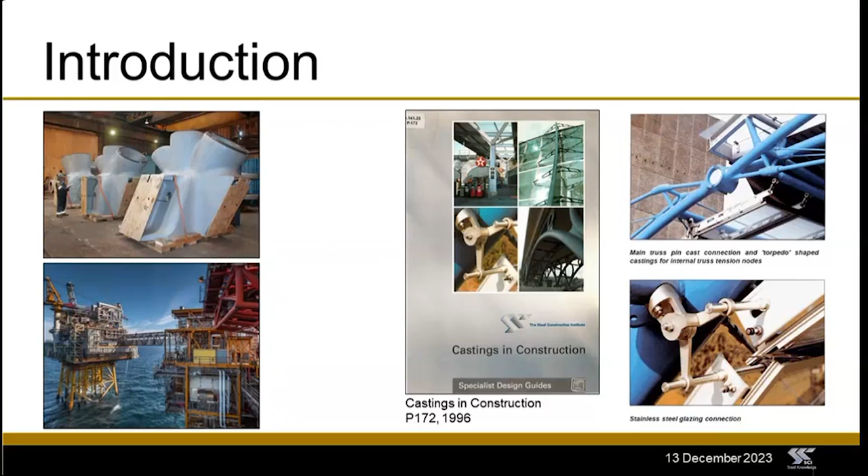So this led to the SCI publication P172, written by myself, being published in 1996. Well, that's quite a while ago, and a lot has changed in the last 27 years. So I've written a new publication, which will be available and sent out to you probably end of January, February next year.

Clearly, we use European standards now, so the new guide will talk about European standards. What else has changed? We live in a low carbon world, so material optimization is very important. So a good reason to use castings. Technology has advanced again in terms of casting design, analysis, and manufacturing practices.

So there's a lot of interesting information to talk about structural steel castings, and I'm very pleased now to be able to hand over to our guest speaker for today's webinar, who is Jennifer Pasden. She's a licensed professional engineer and vice president of the organization CastConnex, and she heads up their office in London. And she is now going to lead us through the webinar. Over to you, Jennifer.

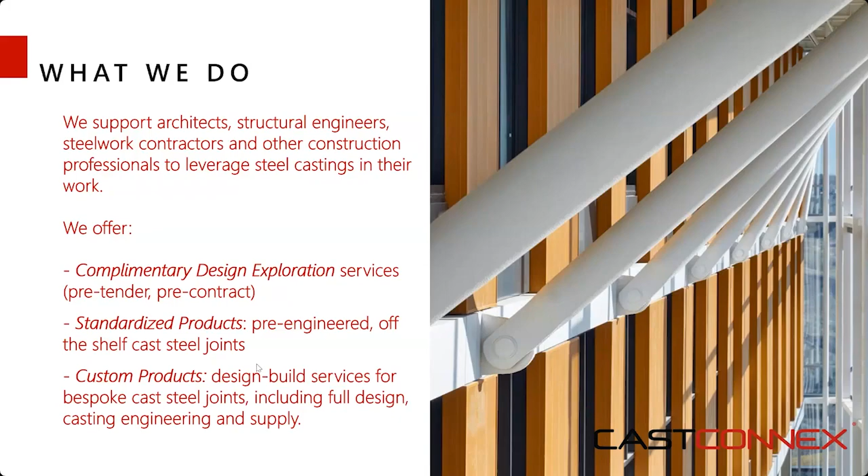Custom products, these would be for bespoke castings that are one-off. So here we're also not pre-engineering, but we're engineering, offering design build services for these bespoke cast steel joints, as well as supply. So on to the first portion of the outline.

What are structural steel castings? Normally if we were in a room together and I was able to see your faces, I would ask for a show of hands of how many people have actually worked with a structural steel casting before. I heard at some point we might have about 300 people, so I would expect there'd be a few dozen perhaps. And that's something that we're hoping to help folks change by having a presence here in the UK.

But also keep in mind, if you've ever used a tension rod connector with a clevis end, that's a steel casting. So in fact, you have probably specified and worked with them. But there's a whole host of opportunities for custom and other solutions that castings can provide.

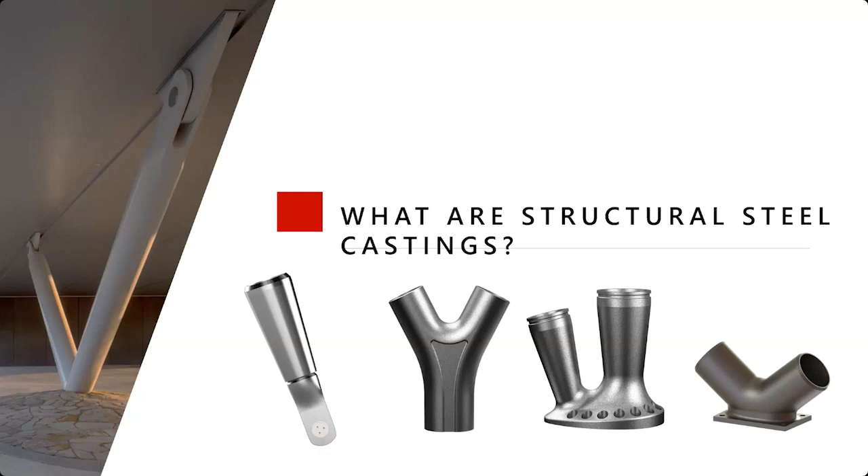So what differentiates a steel casting from wrought steel? Many of you have probably visited a steel mill. You've seen how a wide flange becomes a wide flange being rolled through a die down the line.

But in fact, all steel is cast. So rolled steel, or wrought steel, is actually poured as an ingot, or a dog bone as it's called in the US sometimes, before it's worked and extruded through these dies to create the shapes that we're familiar with specifying in our steel design codes. So that continuous casting process is used for wrought steel shapes.

The difference with a steel casting is that we're not working with extrusions. So in the picture on the right, you see we're building out a mold, we're pouring molten metal into it, and then the finished geometry of that mold is actually the geometry of the casting itself.

So what that does, that is very exciting from a structural engineering perspective, is that it means that we're able to put material where we need it for the flow of forces. So we can assess members coming into a joint, and rather than being limited to cutting up plates, angles, channels, and then bolting and welding them together, we can actually envision what would be the optimal material location to address the flow of forces through the part, and other ways that we can minimize material usage as well as simplify fabrication.

From an architectural standpoint, if there are any architects, we all work with architects, they're our clients, right? It means that architects are able to sculpt structural steel. So they're able to think of this element of structure as also an element of the design. Rather than being prepared to cloak structural connections or hide them behind walls, the structural form can become part of the design expression itself.

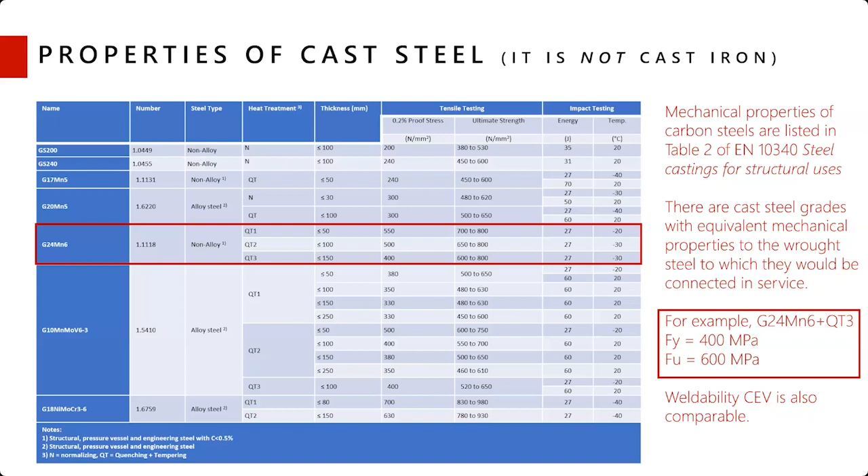Yield stress of 400 MPa, so that's putting it close to your S355. The mechanicals, the weldability, the carbon equivalent, all of that you're going to see is going to be similar for these cast steel grades, which are all standardized in Euro codes, as well as through ASTM specification when we work in other locations.

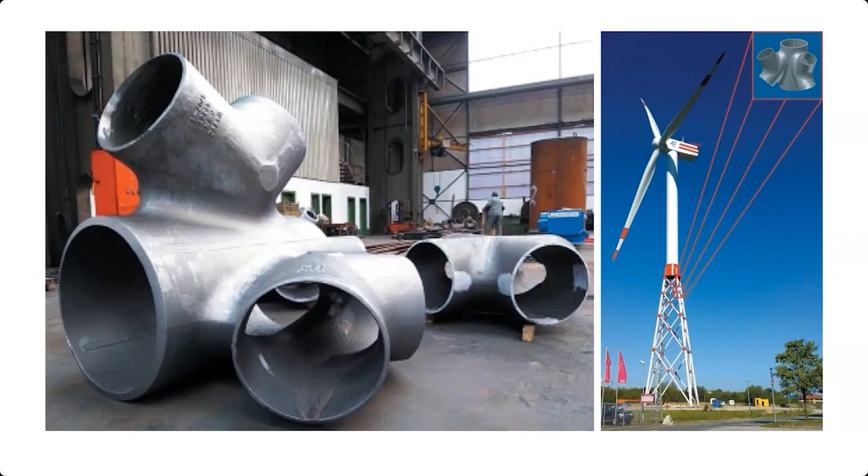For that reason, the first applications of steel castings that we saw in structural applications, as Nancy alluded to, would be in the offshore industry, where quite evidently the mechanical properties of that steel in these ambitious structures is very important. And weldability, as you can see, the way this node is prepared, it's quite evidently going to be welded to the attaching incoming members.

You can see in the inset on the right that this is an onshore mock-up of what will be an offshore wind turbine, and at that red location is where this joint lives. If there are any architects on the line, this is a beautiful looking thing, but it will spend its entire lifetime underwater. So it's not only in architecturally exposed applications where we can think of castings—they're actually very hard working. That's why I start with this example to preclude the myth that castings are brittle, that they crack, and that they have poor material qualities.

A properly designed and properly specified casting will have isotropic materials and can outperform material-wise wrought steel.

The offshore oil industry was using steel castings in these applications because they have things like these giant towers holding offshore oil platforms that are constantly battered by wind and wave action, which brings up fatigue considerations. They're also underwater in a very corrosive environment, so limiting the extent to which the steel might corrode is going to be very important for a structure of this size.

Having to maintain the connections is close to impossible. So the more durability they can find, both from the coating system and by minimizing the complexity or propensity for the coating system to fail by making a much smoother joint, is going to be important.

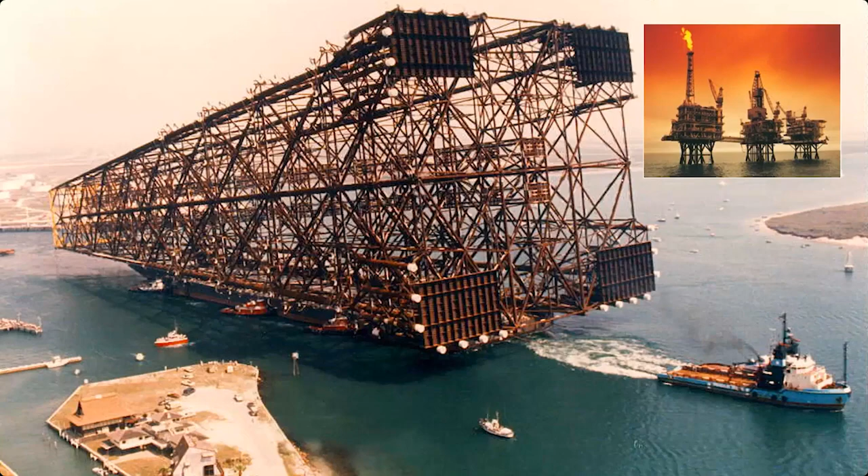So conventionally fabricating a connection like this, some of the things they tried were stepping up and making a through member so that you pull those weld intersections away from each other, so you just have one weld around each tube, and you're not getting weld toe overlaps.

But then once the D over T ratio, the wall thickness to the diameter of the connection, becomes flimsier and softer, there is need for internal stiffeners. It's difficult to fabricate—to stuff a plate inside a tube and weld it, get someone in there and hopefully not leave them there after the connection is fabricated, or grout filling, or all sorts of things.

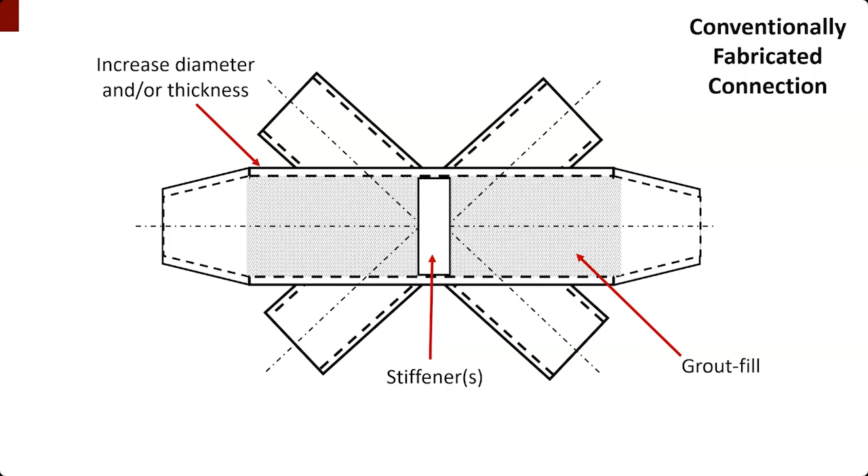But this basically exemplifies how it was increasing the complexity of fabrication as well as overall increasing tonnage at each connection, which makes the structure more costly. Whereas turning to casting manufacturing, they're able to put molten metal where it's needed to address the flow of forces through the joint.

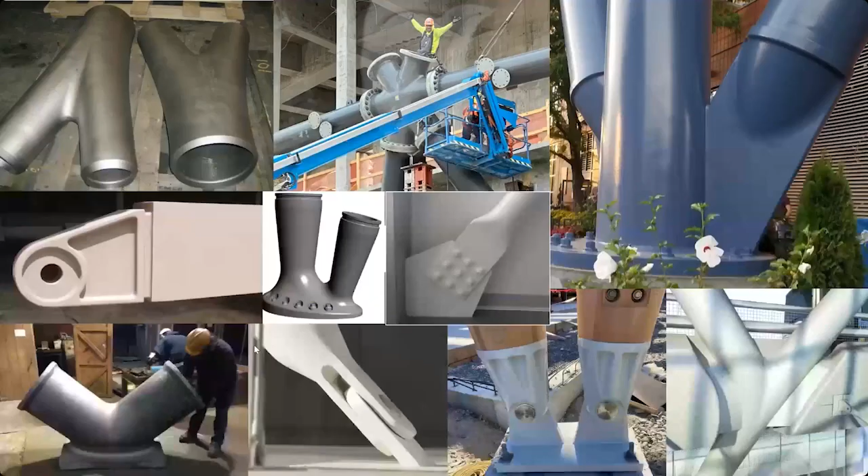Castings are ideal for fatigue, and that's why you'll see so many examples of them being used in bridges throughout Europe, in applications where you have cyclical loading, either vehicular or rail.

The advantage being gained here is that if we were subjected to local limit states at this connection point, the codes would tell you that you need to thicken the wall of the members or increase their size. If you imagine much thicker or wider members, you no longer have this light lattice-looking structure. That's why in so many examples designers use steel castings to lighten up the structure, to address those high connection forces at the kernel, and then use the members to address member forces, which is what they are intended to do.

A concept that's important to understand with castings is that when we're looking at a non-standardized, bespoke casting, the manufacturing process requires a set of tooling to make each one. When there is repetition, there's an economy of scale achieved because the cost of that initial tooling is amortized over the number of castings you have. So something to look out for when assessing a project is whether there's a standardized connector available off the shelf. If not, if it's custom, do you have a number of them, which will help improve the economy.

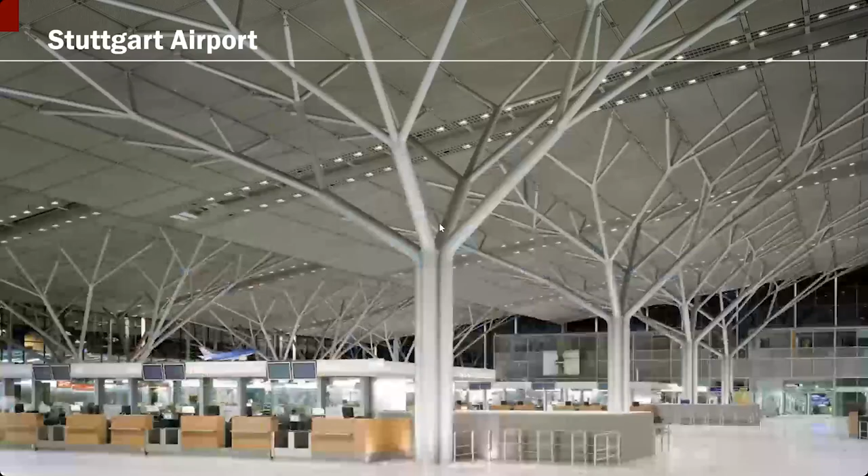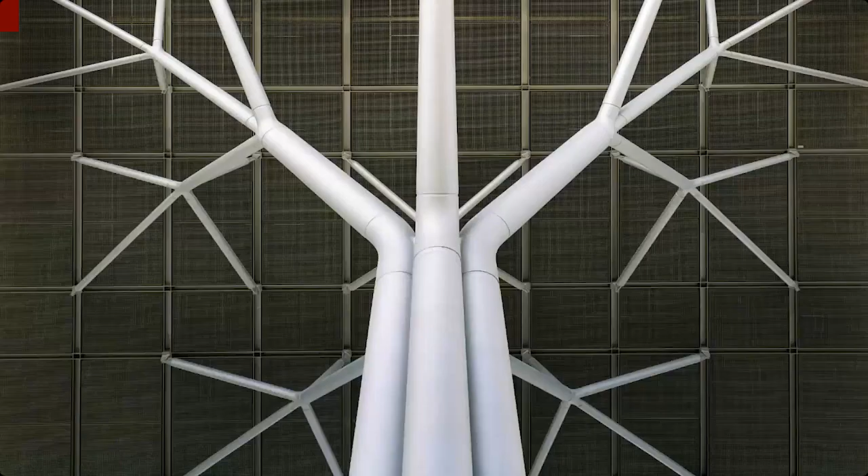Back over in Germany, Stuttgart Airport is a beautiful example of cast steel tree nodes, as we would call them. Certainly there's a more potentially structurally rational way to support a long span roof than with these beautiful trees, but it makes for a statement, it makes for a destination, and really puts this airport in the architectural canon. At each one of these branch locations down to the trunk is a cast steel connection.

Something interesting to note is that, as we'll see later, castings are cast against sand, so their surface finish is a thing to consider. It can be upgraded - it's going to come out looking sort of like an orange peel because it's cast against sand, but it can be ground and polished to be as shiny as you'd like, to look even better than, say, the attached rolled steel.

But you want to take into consideration a number of things, one of them being viewing distance. This picture we're looking at is actually taken with a zoom lens - this is 60 feet up in the air. Only birds at the airport would actually see the casting this close. But having this picture is helpful to describe this molded surface texture that is inherent to the casting manufacturing process.

Other things to consider: if you're going to paint the entire thing with intumescent paint, then the surface finish of the underlying steel becomes kind of irrelevant, because the intumescent paint tends to have a mottled texture to itself. What they've done here, which is a really beautiful accent, is incorporate these recessed reveals into the casting.

You can see with one of the incoming tubes a slightly visible weld mark that wasn't quite remediated, and that's the extent of the casting - that's where the casting is welded to the tube. Then you have this recessed reveal, which draws your eye to the reveal and to the connection point as well. So we're able to celebrate this really interesting geometry that's occurring here, very fluid, representing flow of forces and structural tectonics. But it also draws our eye away from the fact that the surface finish between the tube and the casting would be different because of the different manufacturing processes.

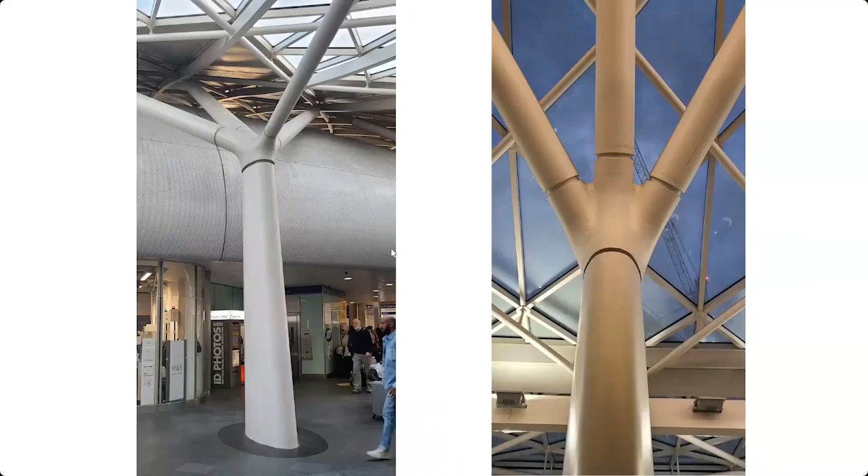Closer to home, I've been enjoying taking a tour of structural steel castings throughout London in my time here. King's Cross, a very notable project, again utilizing sort of a steel tree casting. Paddington Station - if you look up and if you look down, and if you look up at the roof - is loaded with structural steel castings that are really nicely executed.

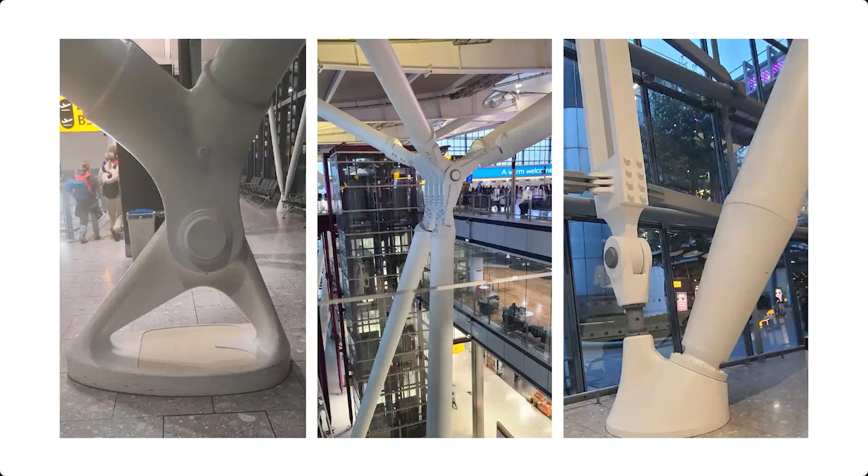Terminal 5, of course, massive castings supporting the structure that supports the long span roof as well as the curtain wall.

So, performance benefits. Why are we using these, although beautiful, and I've spoken about some of that, let's dial down harder on exactly what the performance and construction benefits of cast steel nodes are.

This is a very wordy slide, but I thought I'd include it here to be referred to again later. Overall, structural performance and efficiency is improved by this material use optimization that I've harped on a bit, eliminating the connection local limit states by using members for member forces, and then addressing higher forces at the joint with the casting.

Reduction in member design forces, I'll show an example of that. Increasing connection stiffness and also certainty of connection stiffness.

With the casting, we're pouring one monolithic part, right? So we know what its stiffness is. Whereas with a bolted or welded connection, is it rigid, is it semi-rigid, is always kind of a question. Those connections can become quite soft. With a casting, we have much more certainty, which can be important in applications where stiffness is controlling the design.

Improved fatigue performance, important in bridges, not so much buildings.

Simplifying fabrication. I'm going to do some project case studies, and you'll see that the connections there are left with very simple to access welds, eliminating the amount of cutting and fitting up required in fabrication, simplifying field activities.

With castings, the controlled manufacturing process means that we have tolerances far better than those minimum in fabrication of connections. That means better fit up in the field and reducing risk for all parties involved.

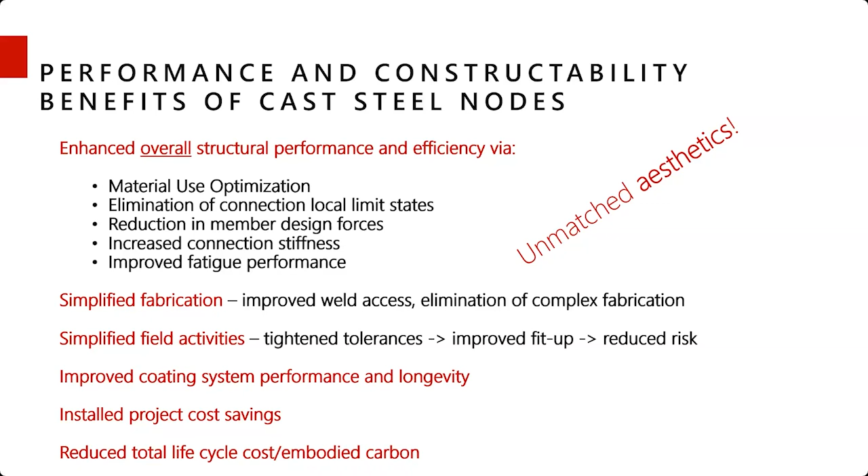But I also added it as sort of an afterthought, because I do want to stress that castings are used in building and bridge applications to do very hard work and improve performance, and very often no one sees them. You just may not hear about them because you can't see them. The case study I'll show at the end of the project is a good example of that.

So just as a thinking model as we go through and look at these project case studies, if we think about one tube-to-tube connection and see what the casting is doing for us - the overall theme is that we're moving the weld away from high connection forces, and we're also reducing geometric stress risers.

If you imagine we're asking forces to come in through that branch member and hang a right angle, that's giving us a stress concentration factor, a geometric stress riser, stacked right on top of where we've created discontinuities in the weld metal. The weld metal is always going to be the place where you have the most discontinuities and potential for failure, and it also affects fatigue.

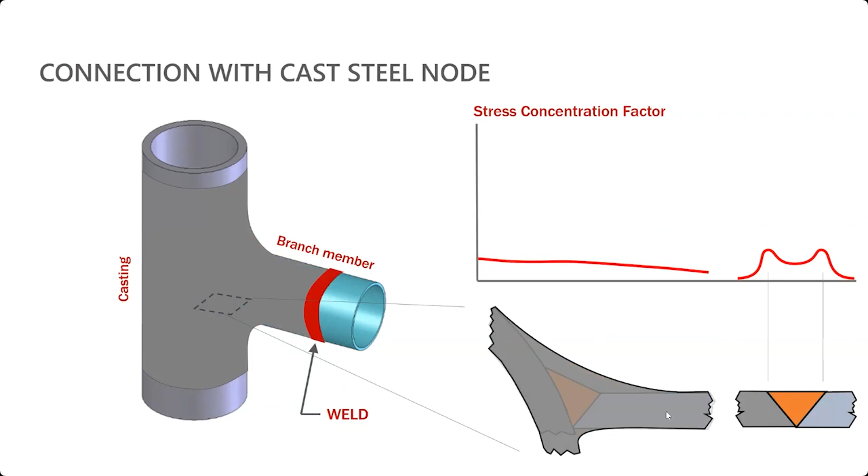With a casting, what we're doing is making that whole joint one monolithic part, and we're pulling the weld away from those high connection forces, providing a more graceful stress trajectory and getting the weld away from where those higher forces would be in any case.

Tonnage saving. Using a tube as an example, although with wide flange or channel connections we sometimes need local stiffeners, we can preclude that need with a steel casting. Addressing what would be a local limit state or a softness in a connection locally, rather than upsizing the wall of the tube so it can do work just at the connection point but be wasted throughout the length of the member, we're concentrating material where it needs to be, providing lower tonnage and lighter forces.

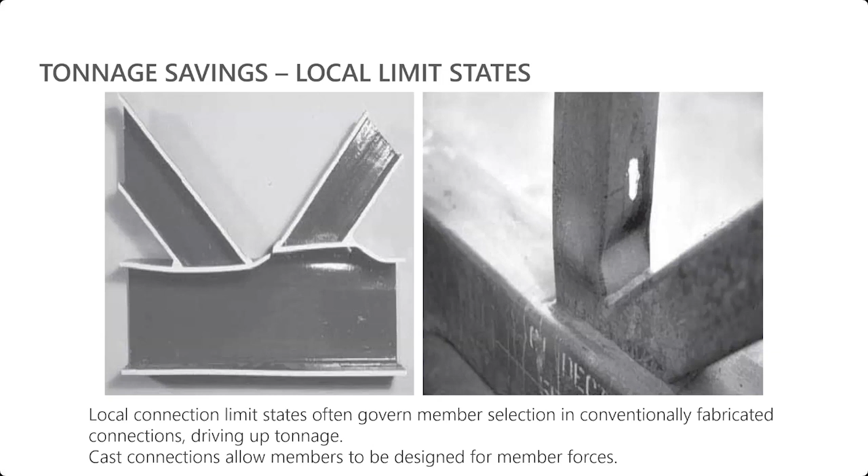Members connecting to castings can be designed for member forces. The other thing that's important to consider, and can become really substantial on certain scales of project, is that we are also reducing the member design force itself. An example here is that the casting connects away from the centroid of this connection, much farther away than if there weren't that nozzle in there. That means we're reducing overall the member design force, which can be quite substantial, depending on the geometric scale of the project.

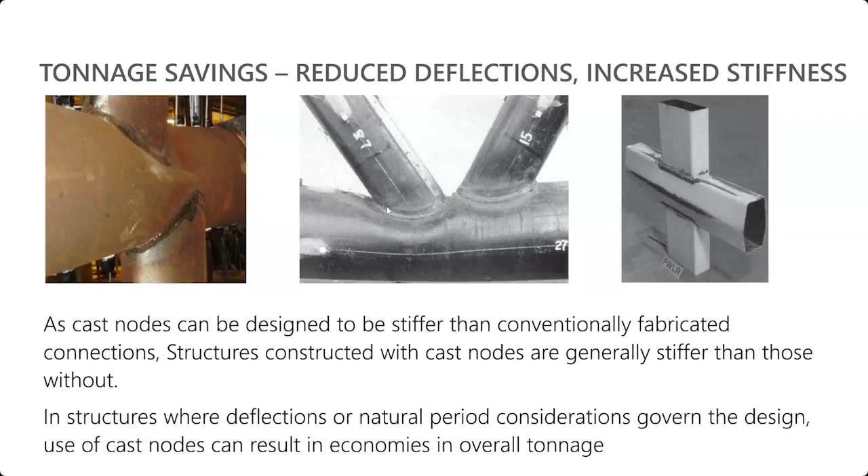Tonnage savings can also come from projects where we have a concern for stiffness. If stiffness or period is controlling the design, we can reduce deflections, increase stiffness, and have much more certainty about what the stiffness of that connection is, because it's one monolithic part and doesn't have these sort of vagaries with welding and bolting.

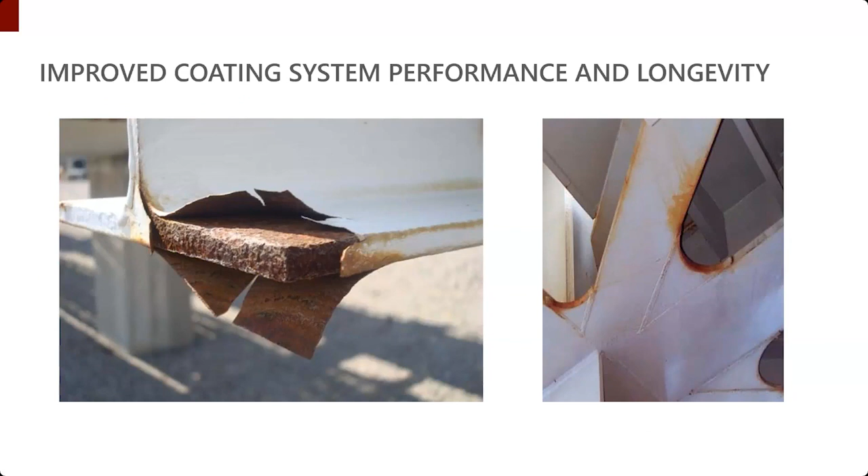Not something we think about as structural engineers, but if you are an owner or a taxpayer, you are going to be concerned, especially for public projects, about the quality of them, their durability, and the expense to maintain them. On many of the projects we do that are outside or transit stations, it becomes very evident that having these more generous radii that do not encourage corrosion and failure of coating systems, having welds that are easy to access, easy to coat, and also easy to inspect both for structural performance and later for coating inspection, simplifies that process as well.

If we think back to the offshore oil structure, it's very important to have the coating system performance, and it's also important onshore. So now that we've looked at some of these performance benefits, if you're thinking you've never used a steel casting in a project before, what are some of the top applications where we can utilize structural steel castings?

Architecturally exposed structural steel, or AESS as we call it in the US and Canada, particularly for structures comprised of circular hollow sections, or even rectangular or timber. We're seeing more and more mass timber being built around the world. Timber connections are difficult, and any mass timber structure of any size is actually going to be steel-timber hybrid. Because of their geometric flexibility, castings can be a really good solution for mass timber connections.

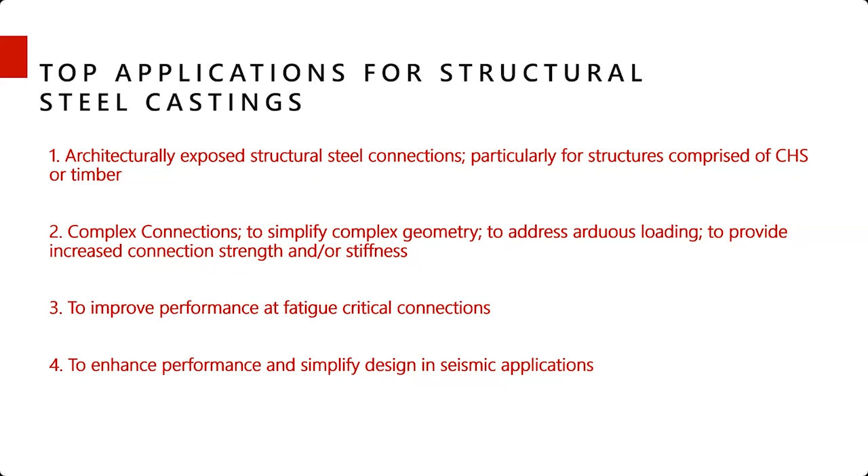Complex connections, whether it's geometric complexity or arduous loading, again allow us to dial down more on connection strength or stiffness when we have a structure whose performance is going to be dictated by it. Fatigue is another application, more in bridges than in buildings. And then, though I won't talk about this given our location, we have quite a bit of experience developing connections that are important in seismic applications where earthquakes are a concern in the region.

So on to some project case studies that elucidate a number of these performance benefits in the top applications I spoke of. The first one is actually a seismic application, which I'll explain quickly. Salesforce Transit Center is a 4.5 city block long transit station in downtown San Francisco, California, on the Pacific Ring of Fire, sitting on a fault line. It also sits on garbage—basically the soil is all fill. So all of the worst conditions you could imagine for a building to survive a seismic event.

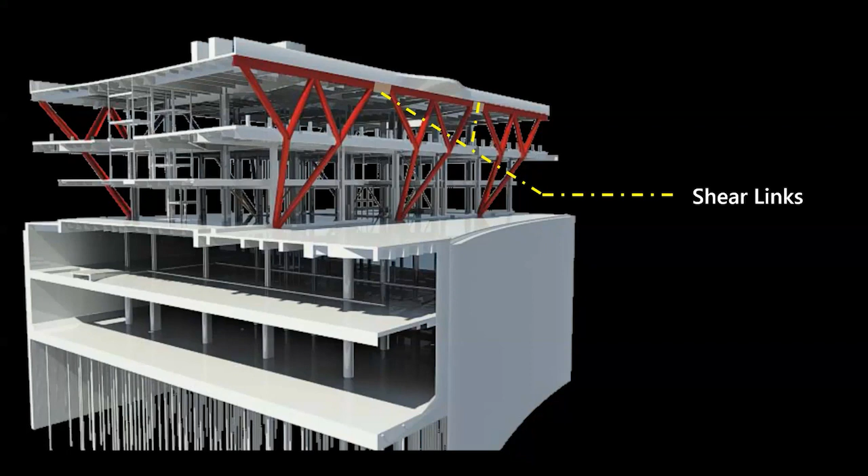The concept on this project, designed by Thornton Tomasetti in their LA office, was to use what our codes call an eccentric brace frame, or EBF. Conceptually, the shear link that sits between these modified braced columns is not concentric, it's eccentric, so it gets destroyed as the building racks back and forth in a seismic event to dissipate seismic energy. For that to happen, it's very important that these braces and their connections don't fail first, so they are capacity-designed to ensure the performance of the shear link, allowing it to actually do its work dissipating ground motions.

Also of note, these braces are exposed and wrap around the entire perimeter of the building, becoming the main aesthetic aspect of the building itself. For these reasons, the designers chose to utilize steel castings at the connection points of these large pipe sections. You can see there's a pin at the top. The bus deck node in the middle joins these two-to-one braces as they come down, and then at the base, where we have a close viewing distance for people using the transit station.

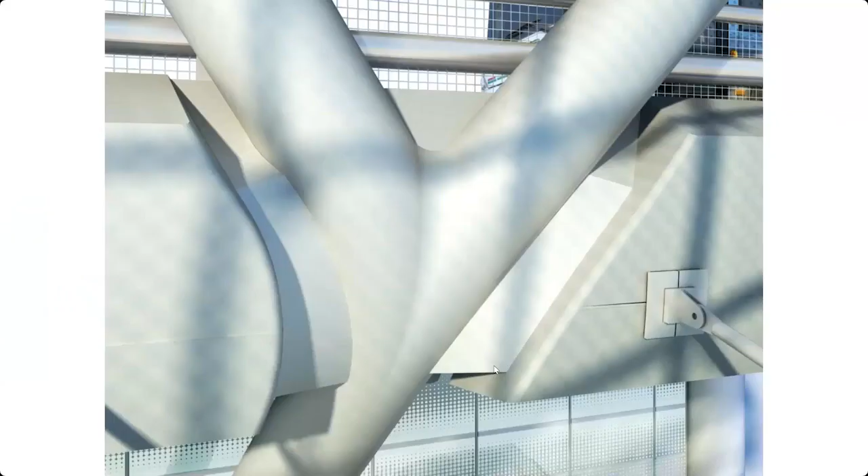A nice close-up here. If you try to think through how that might have been fabricated, it becomes a puzzle, how this would actually be fabricated with conventional methods. And not only that, but how would it be fabricated, and then how would they cover it up? Because it would not have looked very nice.

Whereas you can see in this last photo here that we've covered up the bolted connection at the ends of the tube to the plate girders, but overall, the structure is becoming part of the expression of the architecture, and the flow of forces through the structure can be seen in the joint.

Another aspect of this project that utilizes castings is something called a light column. We'd like to think of this one as sort of a kit of parts. It's a series of roller bent circles that are enabling this opening up of the column that gradually opens up and supports an atrium that lets natural light in.

Each one of the verticals is actually just a straight run of API pipe. So all of the intelligence, all of that gentle curvature is contained within the geometry of the casting itself. With the CNC machine precision that we have in these nozzle ends, we know that as long as that pipe is straight, when it fits up with the casting, it's going to be exactly in the right place when it fits up with the next casting.

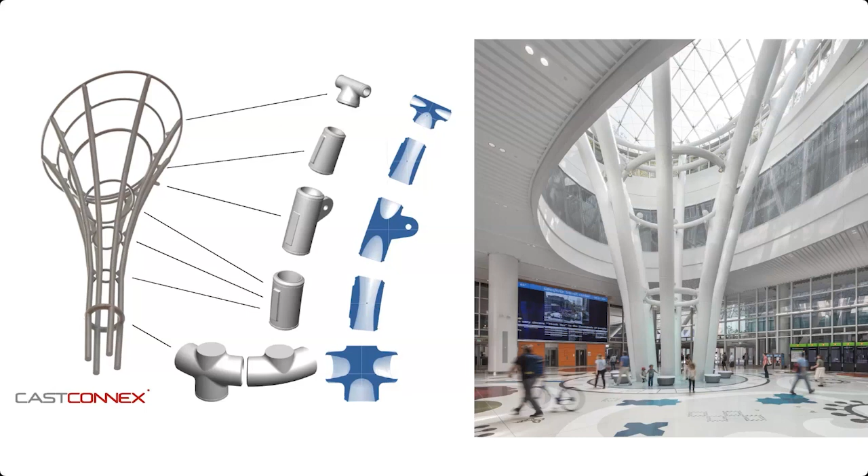You can also see in the cross section here that we are tweaking the wall thickness. We're thinning it out to match the member wall thickness, and then thickening it in the middle here where we have these local point loads that are coming in from the rings itself. So a real expression of optimizing material usage.

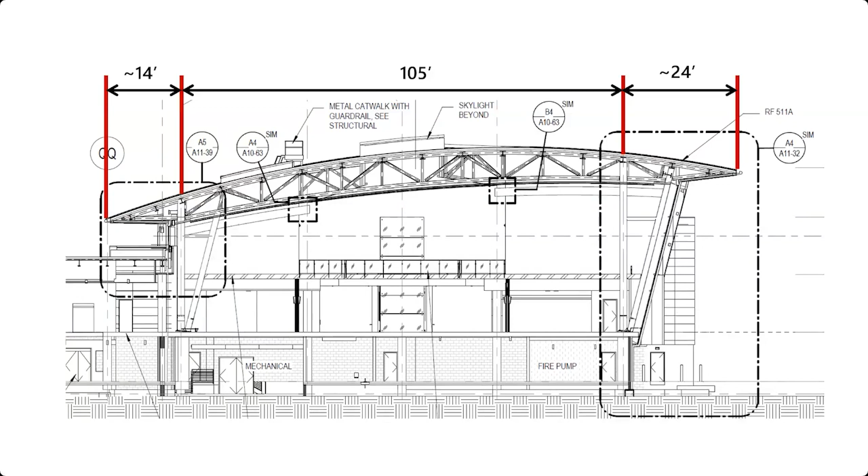This project, Charlotte Douglas International Airport expansion, if you imagine a cut through this cross section, there's a long span trussed roof that's supported by a vertical and a raked column. And the designers here really wanted to celebrate the structure rather than what is often the case in airports, where these things will get hidden behind architectural metal.

So they reached out to us, and this is something that we and other casting suppliers can do with clients, is take a look at, okay, what are the geometries? You have a vertical column and you have a raked column. What is the outer diameter that you're getting to with your design at this point? And then we start to think about what it could look like and also how it's going to be constructed.

In this design exploration process that you can see here, we were entertaining the idea of maybe having a pin connection, which we thought would be potentially helpful for field erection. But where we ended up with them was actually they wanted something that was very smooth, so that there would be less likelihood of people banging into it and having its coating system chip off.

So it would have less corners to collect dust and dirt and detritus. And then also they wanted to not intumescent coat the base of this casting. So we had a clever way around that, working with the fire protection engineer.

But I'll just show you, this is an example I like to show from JFK Airport of the reality of your life as a structural connection in an airport, is that people are going to bang against you, they're going to drop dust on you, and no one ever includes in the maintenance plan how do we upkeep this connection. So this is not the oldest terminal, and you can see that this has been through quite a bit of wear, and also features a lot of sharp edges and layers and things like that.

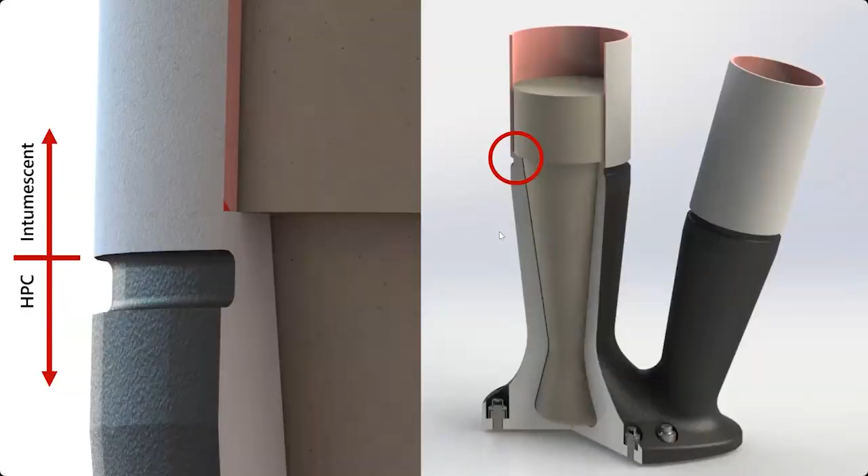So having a more smooth connection geometry here was the goal. And then also to preclude the need for intumescent paint, because the casting is hollow, we're able to grout fill it for some of that fire resistance. And we were also able to easily tweak the wall thickness of the casting so that at elevated temperatures, the demand capacity ratio in the casting would be such that we wouldn't be worried about a failure.

So you can see these castings in the wild here and how nicely they have turned out. That is a custom casting. Also featured in this is a standardized casting — it's a taper pin connection, which I'll talk about briefly at the end.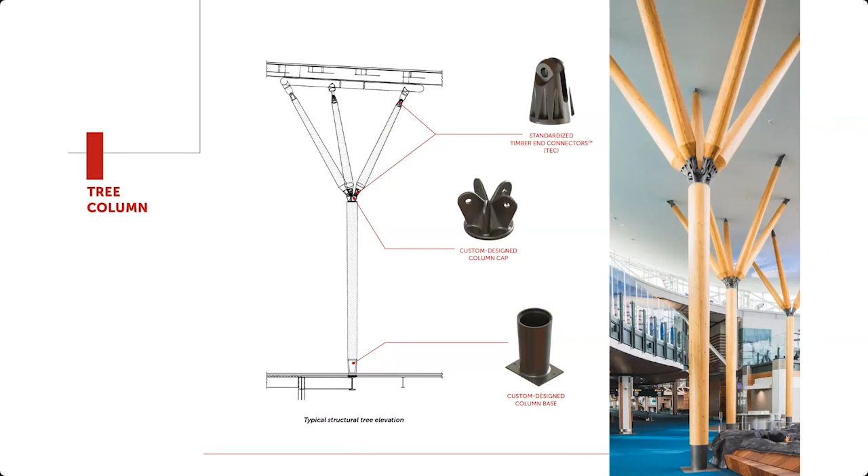Mass timber is another top application. Here we have these glulam trees that at each connection point have either a standardized or a custom designed stainless steel casting. We can cast in carbon steel or stainless steel. In this case, stainless was chosen because they didn't want to paint the steel, and also this is a bit of a humid environment, so they wanted that protection.

In New York City, Arthur Ashe Stadium is actually another seismic application. If you see these mega columns at the base, the whole thing is meant to work as a specially detailed concentric brace frame, which has certain requirements for detailing such that this gusset plate can hinge out of plane.

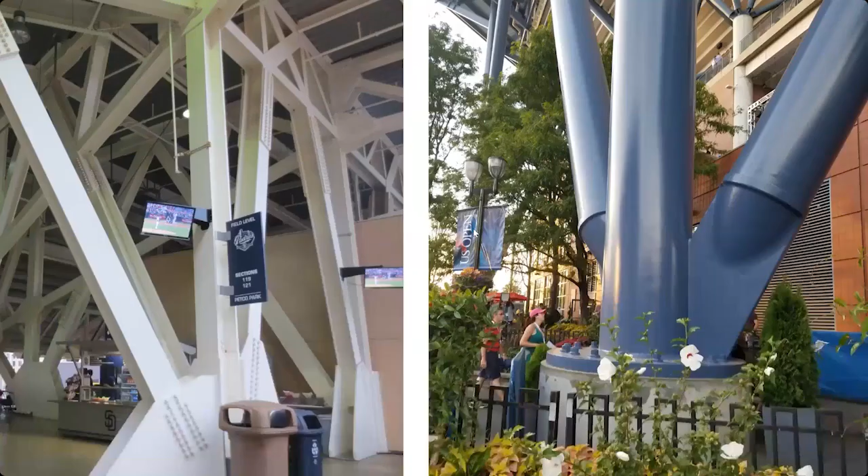To allow those braces to dissipate seismic energy in the event of an earthquake, the extent of the casting is shown in this render, and it's just welded to the tube and the base plate. To give you a sense of what a fabricated alternative might have looked like, the gusset plates on these SCBFs get very big. This is not actually an SCBF, but anytime you have a gusset plate to column connection, we see this a lot in stadia — you have gusset plates the size of the concession stand back here, whereas here we have a much more compact, high-performing, and lighter connection solution through a casting.

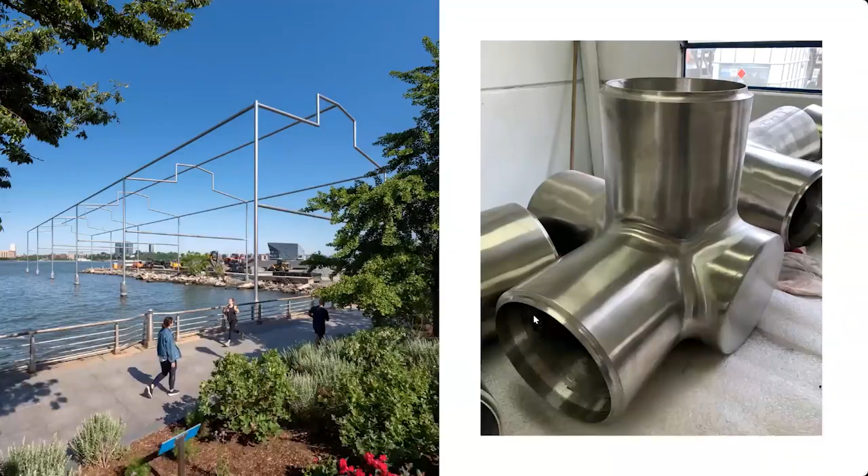We sometimes work on art projects. This is actually a structure, but it's a permanent art installation. This is another example I wanted to show because it is super duplex stainless. These joints at the top of the roof are cast in super duplex stainless equivalent grade, and they're allowing the slenderness of the structure. It's meant to be very ephemeral looking — it almost looks like it wouldn't work, but that's because all of the moment happening here is happening through a casting that gets very, very thick. If you were to try to execute these connections with fabrication, the members themselves would have been quite a bit thicker and bulkier.

This project with Rogers Stirk Harbour, WSP, and Eckersley O'Callaghan is World Trade Center 3. This is actually the lobby, where the designers wanted to use this articulated pin connection shown in their drawing, and building it up out of plate turned out to be quite costly, but we were quite easily able to cast it. It really shows the creativity allowed when understanding casting manufacturing — what we can do to the lowly pin connection to make it a really interesting part of the design.

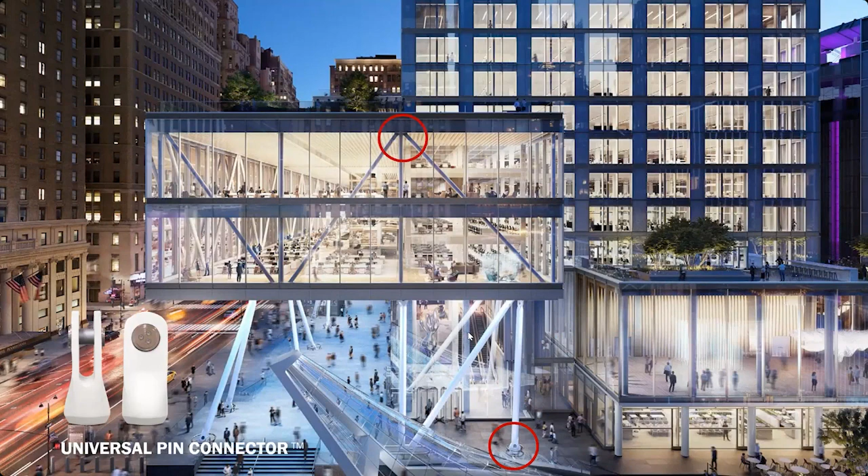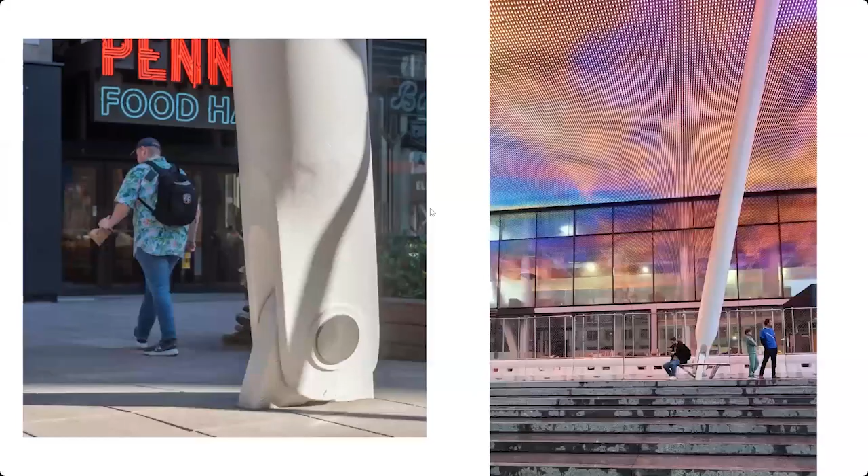This is another standardized product application, this time a commercial one. We have universal pin connectors, or UPCs, at the ends of these 60-foot tall raked columns that support this bustle of commercial space, as well as in the vertical bracing at the top. For sense of scale, that's a 610, so 24-inch OD, or 610 millimeters. This is a project with SOM, again utilizing a standardized pin connector as well as a custom V-base at the bottom, for a university application.

All right, now into the meaty part. Now that we've seen some examples of both projects that utilize standardized pre-engineered steel castings and some that use custom castings, let's dig in a bit further into the project delivery process for custom steel castings.

So first, starting with who is this casting supplier and what is their job? The casting supplier's scope of work, I like to include the pre-tender. Before the project goes to bid or tender, in order to assist the specifiers — the design team, structural engineer, and architect — in assessing whether a casting is a good fit for their project, there is the opportunity for the casting supplier to provide conceptual design and budgetary estimating.

If you think back to the Charlotte Douglas Airport casting that I showed, we have these various different design iterations. That was a process of thinking through constructability and also aesthetics for the designers, thinking through how we incorporated that fire resistance, and then also providing them with budget estimates so they could ensure it would fit within their project. So that's an important step for custom castings because they are project specific.

There's not a list price as opposed to, say, a standardized casting, which would have a list price. So many casting designers will work through this process with you, again, without being contracted, with the eventual idea that hopefully they will be able to bid the project when it does go to tender.

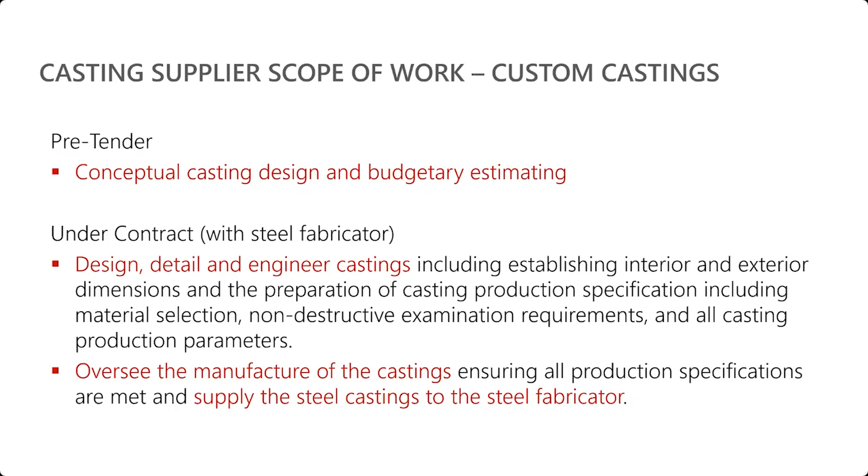That includes establishing interior and exterior dimensions, so drawings, and the preparation of a casting production specification, which includes material selection, NDE examination requirements, and all production parameters for the casting. It's a very thick and technical spec, but essentially the casting supplier is responsible for delivering to the project steel castings that meet the performance needs specified by the design team. The casting supplier also oversees the manufacturing of castings, making sure that production specification is met, and then ultimately supplies them to the steel fabricator.

So in the guide, to help clarify some of this process, we have some visual aids that I'll give a sneak preview of. This is trying to describe the sort of contractual relationship. The hard line is contract, so the casting supplier works under the steelwork contractor.

Foundries are the people that make steel castings. In the way that we operate, we subcontract that manufacturing to the foundry, but we take responsibility for every element of it and make it very clear to them what we're expecting, including non-destructive testing, destructive testing, and all the submittals they need to provide to us to ensure they're meeting the production specification we've written to meet the performance specification, which comes from these bodies: structural engineer, architect, and to some extent our customer as well, the steelwork contractor.

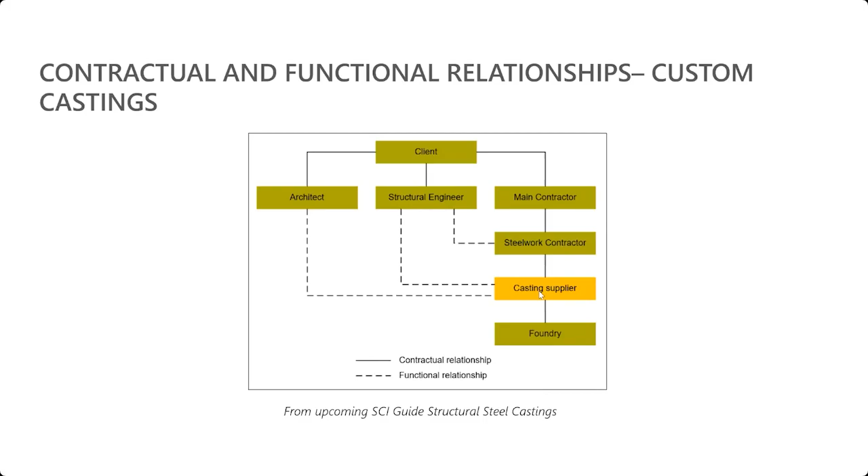We go into more depth on this in the guide, but just to let you know that this is going to happen, and you probably want to spend more time with it outside of this presentation if you're interested in specifying a custom casting.

There are three main communication or submittal documents: the performance specification, which I alluded to before, given to the casting supplier by the design team. The casting design report will contain all the evidence of the engineering assumptions, the geometry of the casting itself, any FEA conducted for the custom casting, all the assumptions that go into the FEA, and also proof of concept.

The FEA results, how we interpret them, and how they are linked with the performance required by the structural engineer is all very clearly described, pictorially and tabulated. All calculations are listed, so it's a very thorough report. The way to think about it is that as the casting supplier, we are the casting engineer taking responsibility for that, but we need to prove to the structural engineer that we are providing them with something that will meet their project requirements.

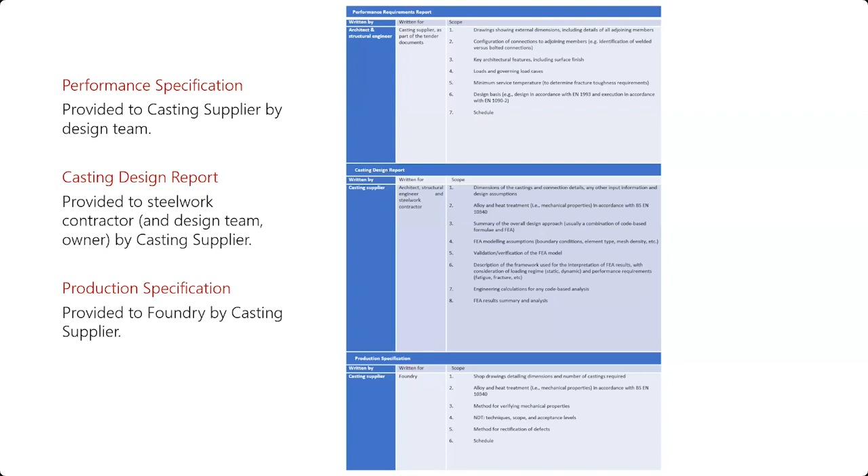In order to do that, the casting supplier writes a production specification, which goes to the foundry, detailing, as I said before, all the requirements for what the alloy is, what the method is for verifying mechanical properties, what the required submittals are, and some other things I'll talk about more in the example.

I probably won't spend as much time on this as I thought, but again this performance specification is outlined inside the guide, and is essentially architectural and structural performance requirements developed by the designers and given to the casting supplier. This would occur after the job goes to tender. In order to quote or bid on the custom steel casting, the casting supplier needs this information so they can develop the quotation in a way that ensures it will meet the performance requirements. So this happens at tender, and this information would be included both in drawings, detailing where the casting is, what it's connecting to, and whether it's part of a lateral force resisting system.

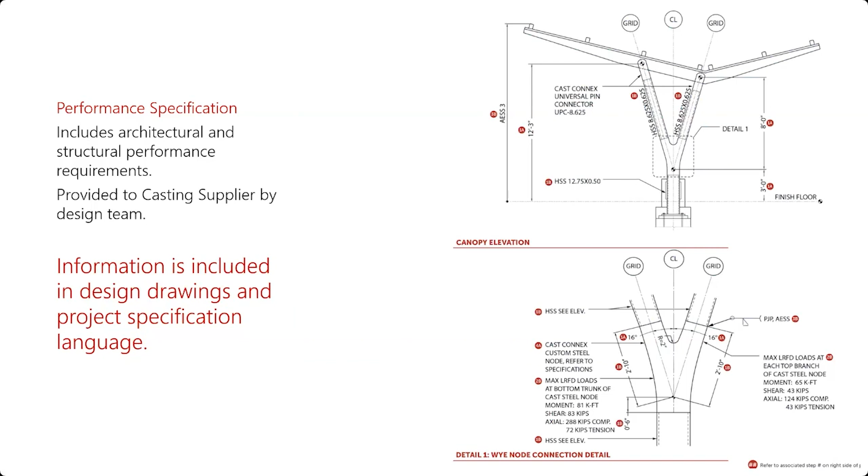What are the loads that it will be seeing during its lifetime? What is it coated with? All these things are also included inside of the specification language at tender.

The casting design report is developed once the job has been tendered, the steelwork contractor has been awarded, and they award a contract to the casting supplier. This is when the engineering work that will ultimately be reported inside of this casting design report is commenced upon by the casting supplier.

They will supply this to the design team through the customer before commencing with manufacturing of the casting. So this is a submittal that needs to be approved. It needs to be discussed and coordinated, and we need to make sure we're all on the same page until we go forth and start to make the casting.

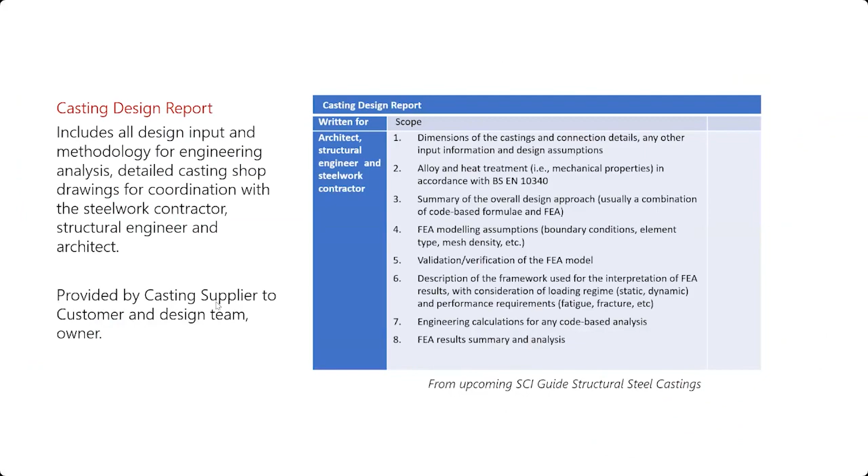Some examples would include mesh densities, mesh types, sensitivity analysis, and post-processing of FEA results. Also, in any custom casting, typically there are locations where we can use codified equations, so those hand calculations would be given. It's in the locations where we're not following beam theory, where we have disturbed regions that we need to use finite element analysis, that we need to make clear all of our assumptions and process.

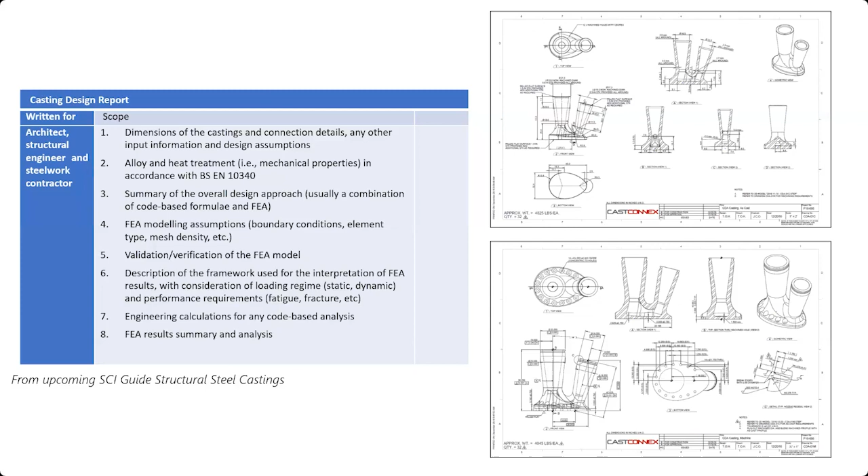Ultimately these shop drawings are developed as cast and machine shop drawings. Those are also communicated to the foundry, because they are the ones that are going to be constructing the molds to create this as-cast geometry. That is part of the production specification, the shop drawings, as well as the requirements for production.

What is the BS EN 10340 grade that you are using? What are the other standards that are referenced for non-destructive testing, destructive testing, and at what frequency and in what method are these things reported?

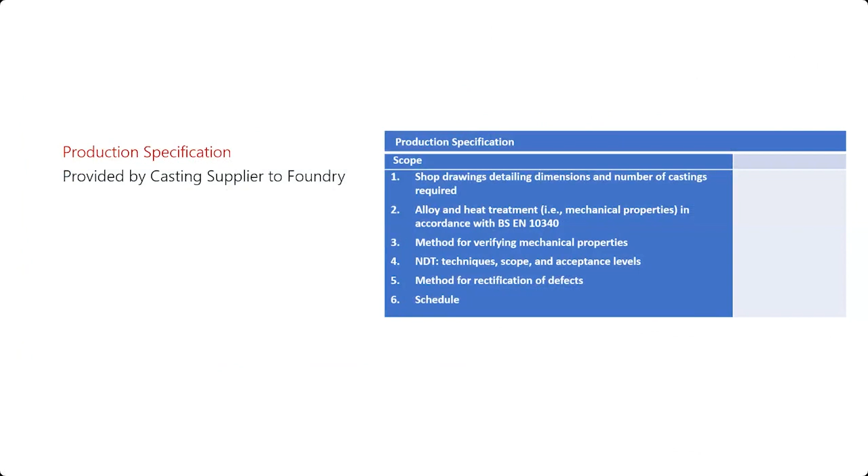Rectification of defects - I'll talk about that briefly when I use this case study to hopefully give an example of how not only are the performance benefits of castings leveraged in this project, but also how that flow of information transfer works on a custom casting project where we have the casting supplier taking responsibility for the design and supply of the cast steel connections.

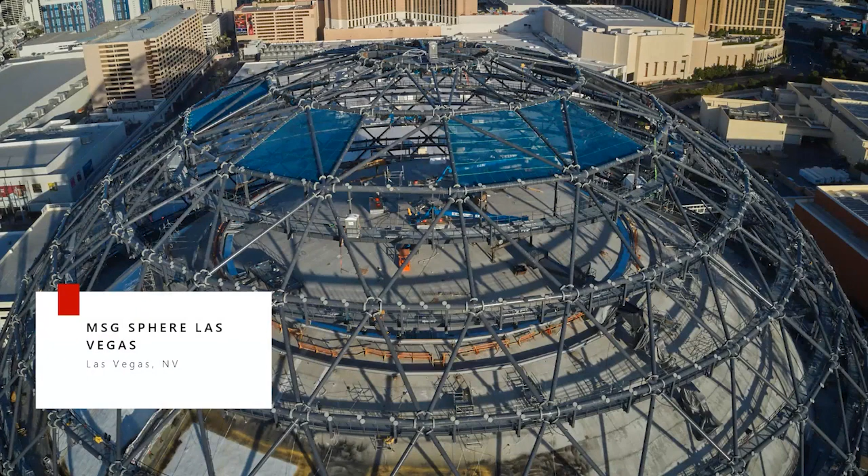Tucked inside of the exosphere is the performance venue, and tucked inside of the performance venue is a spheroidal grid shell that is hung from the dome roof. I won't be able to talk about that today, unfortunately, but that's what you've been seeing on social media - the U2 concert and all of the amazingness that's happening here. Too bad I can't talk about it.

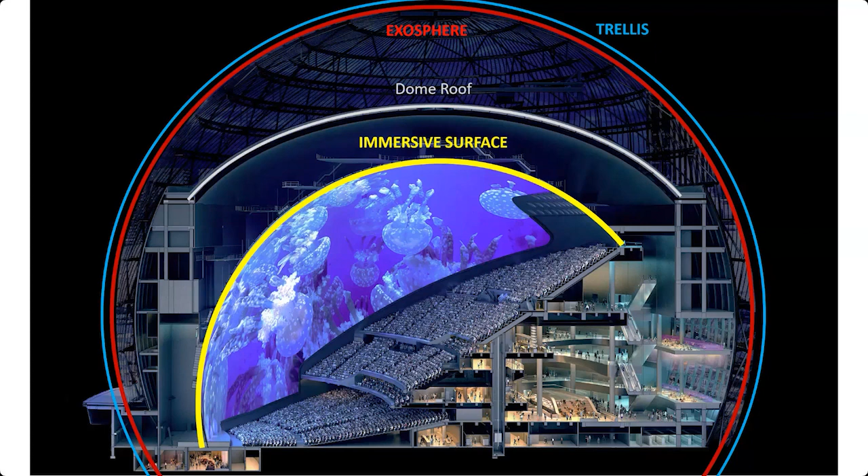There were hundreds of connections in that structure that enable it to have the tolerances required to make a never-before-seen LED screen. And there's speakers and they blow air on you and there's smells. I don't know, it's a whole thing.

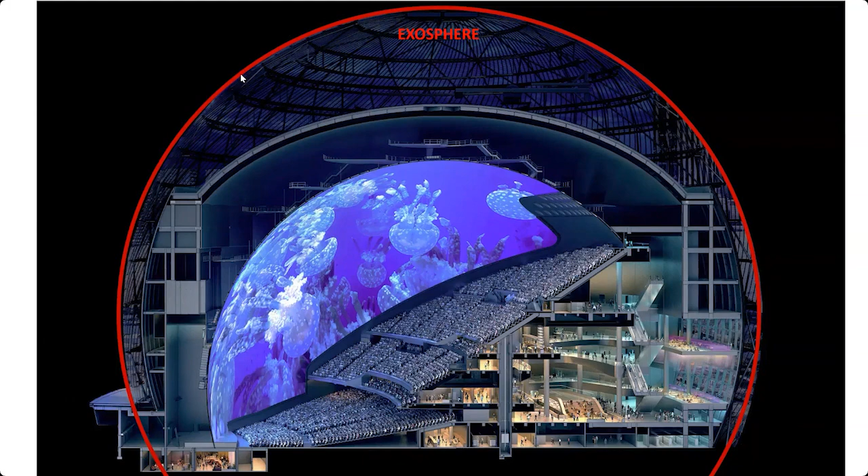So unfortunately we can't see the castings, but what they enabled is pretty impressive. What I'll talk about more here is this red exosphere - this is what makes it the largest spherical structure in the world. It's essentially like a modified geodesic dome, so some of the rules were broken for the buckyball at the top in order to make the connections more feasible.

Also important to note that all of the pipe here connecting to the castings is just straight runs of pipe. The castings are doing all the work from a geometric standpoint, which again takes advantage of the controlled and tighter tolerances that are achievable and consistent with steel castings. In a grid shell, tolerance stack-up is a real concern.

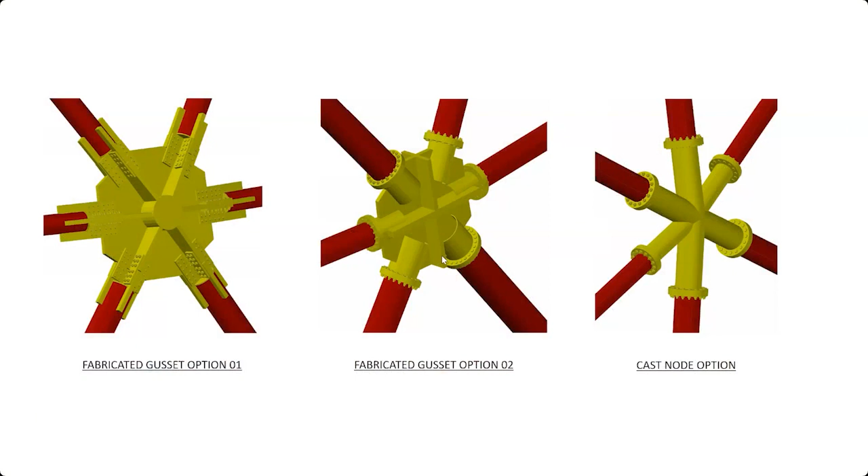If we look at the initial options explored by the design team, there were two fabricated options, and then there was this concept of perhaps using a cast node. This was all before tender. In this application, we had the opportunity to work with the structural engineer of record, the owner, and the pre-construction steelwork contractor to help them explore more thoroughly the realities of what the casting would be offering, and also to draw to light some of the shortcomings of the fabricated concept.

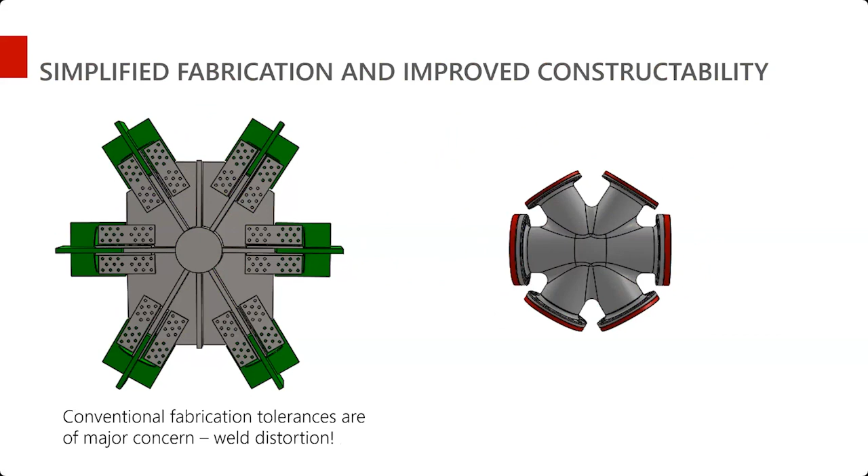So what you're seeing on the image right now is, at scale, an example of one of the cast steel nodes in this project. You can see the casting is much smaller, much lighter, and much less complex. Something that was kind of missed in the original concept was that these castings, because the connections themselves connect to straight runs of pipe, their arms have to be canted slightly in each direction and very exactly, or that tolerance stack becomes a project killer.

To take these plates and weld them slightly canted would have been very problematic because there's always distortion happening when we have welds. So to think that all 6 of these arms wouldn't be slightly different and off in one way or another was probably a pipe dream. Whereas with the casting, each one of these touch points you see in red is where the flange plate end of the pipe member is going to fit up with the casting, CNC machined and exact. I'll show you later, it's all scanned to ensure they're exactly in the correct place.

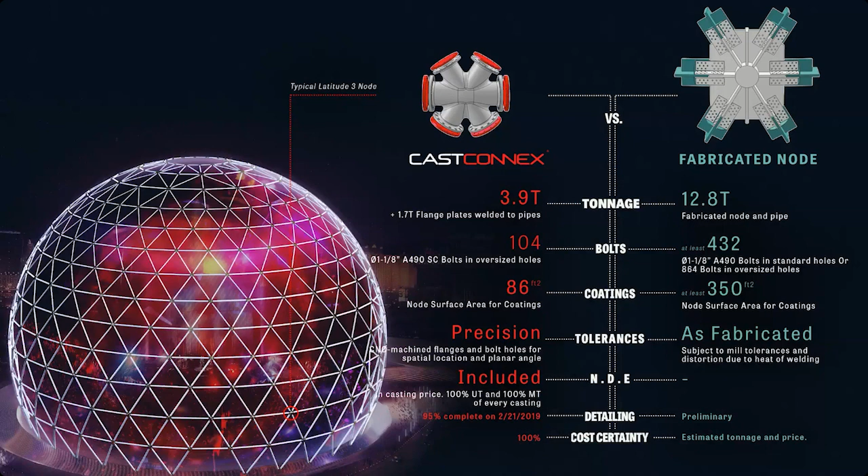So this was an infographic we put together to help explain some of the advantages of this cast node option. We can see a third of the weight, and this isn't even the most complex joint on the project—up here we probably would have been at a fifth of the weight. Far fewer bolts, so timing of construction is important. The amount of time it takes for a person to tighten a bolt is something to consider.

Coating system—again, I harped on how we don't think about that all that much as engineers, but it is important. And precision, again, with this CNC milling. Also, all of our price for quality control and non-destructive examination was included when compared against this fabricated node option. So a lot more certainty and control up front, a lot of risk reduction, which is very compelling to all parties involved in the project.

So what happens next? Once the steelwork contractor provides a contract to the casting supplier, there's that communication flow. The structural engineer needs to provide center lines and member sizes, the geometry, and also the loading on the casting itself. That would be part of what they're communicating in the performance specification.

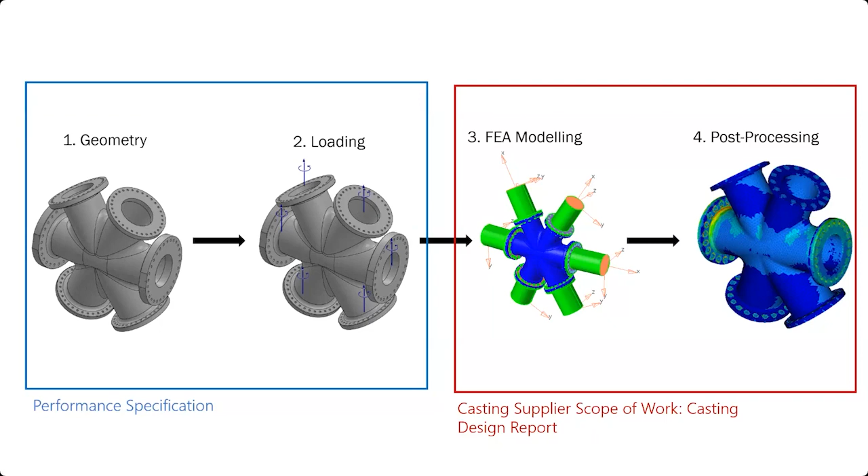Then begins the casting supplier's scope of work, which also eventually goes into the deliverable that will be the casting design report. So there's the finite element analysis, modeling, post-processing, and putting it all together into a package that is easily understood by the structural engineer, ensuring that we've coordinated and are meeting all the production performance requirements of the project.

Something to take note of in this level of FEA is that we have to be very savvy—yes, there are locations of this part, like the tubular members, that can be done as beam elements, and perhaps the flange plate. But this was a good example where we realized that this type of flange plate connection, the equation for prying, at least in the American codes, doesn't actually really apply the way this geometry or connection is detailed.

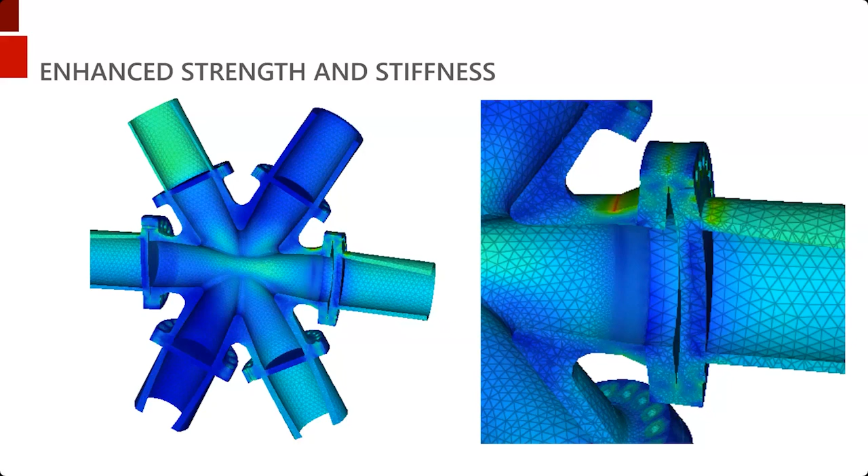Recognizing that, we were able to do nonlinear analysis and really dig into what's happening when that prying starts to happen, to make sure globally it wasn't going to be a problem for the overall structure, and also so you weren't going to have problems with the connection strength itself. That's something this finite element analysis allows us to do, which isn't your everyday connection design, compared to more general codified equation designs.

I mentioned a few times about strength and stiffness being important. It's important when we're working with a structural engineer that we can ensure whatever they've included in their global structural model, their assumptions, we are meeting or exceeding when it comes to strength and stiffness. So this was a check we did on that—the engineer had modeled things as just centerline-to-centerline tubes. The casting does prove to be stiffer than a centerline-to-centerline tube connection, but it's something we want to coordinate and make sure of on all projects.

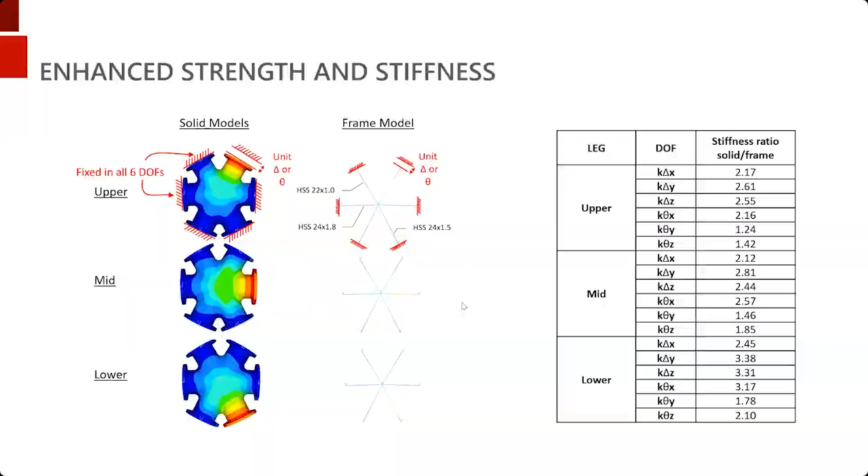Through all this engineering work developing the designs, another deliverable is the as-cast and machining shop drawings. Now very quickly, a little bit about how we actually manufacture the casting.

Castings are cast against sand. In order to make that sand mold, we first create tooling out of timber, so CNC milled timber tooling. That tooling is basically the negative and the positive of the part. We surround it with chemically treated sand that sets up, has a binder, and becomes very hard very quickly. That will ultimately be what the molten metal is poured against.

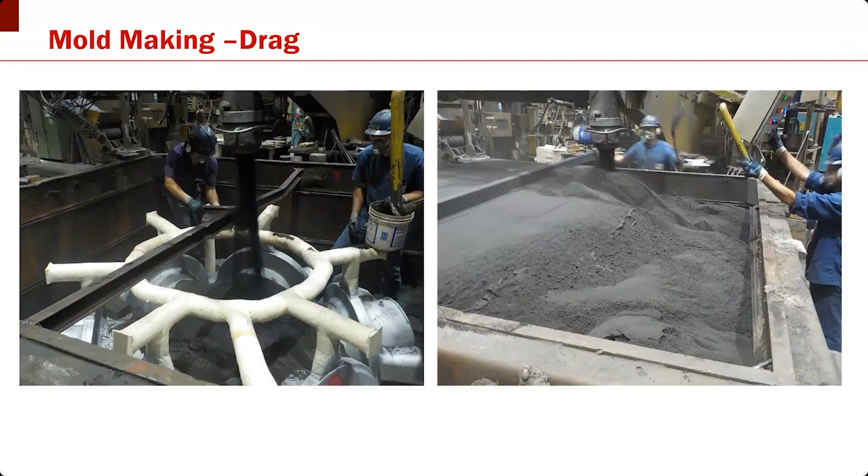So here you're seeing the actual sand molds. The entire thing is enclosed in a steel box, basically to counteract the fluid pressure of the molten steel as it's poured into the mold.

In situ, each time we're doing a pour from one of these ladles, they are doing spectrochemical analysis to check the alloy, and also pouring keel blocks either attached to or separate pour bars. Each destructive or non-destructive examination test that happens along the lifetime of this casting production is tied to the serial number of that unique casting, so there's traceability back to the pour and back to all the testing results.

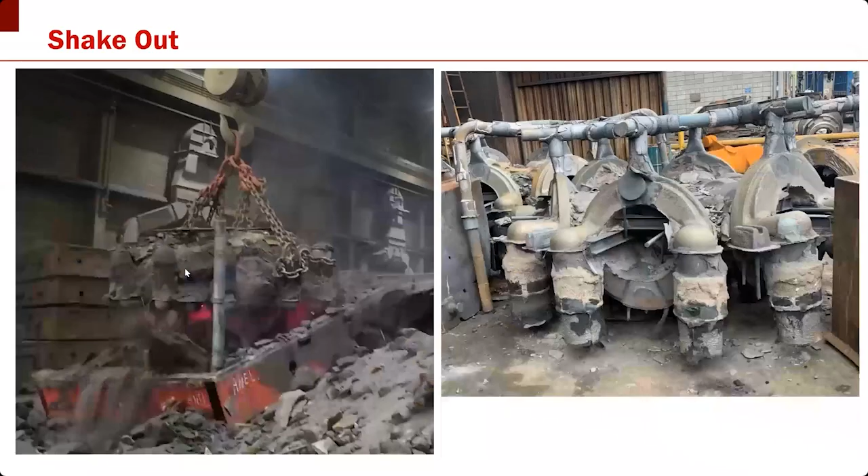Skipping ahead a few steps, it's poured and sits for quite some time. The binder decays and the sand falls away from the casting. These appurtenances you see here are a key part of the casting manufacturing, ensuring that when the steel starts to solidify, it solidifies from one side to the other. That directional solidification means we have grain structure continuity inside the part, which allows us to say that it is isotropic.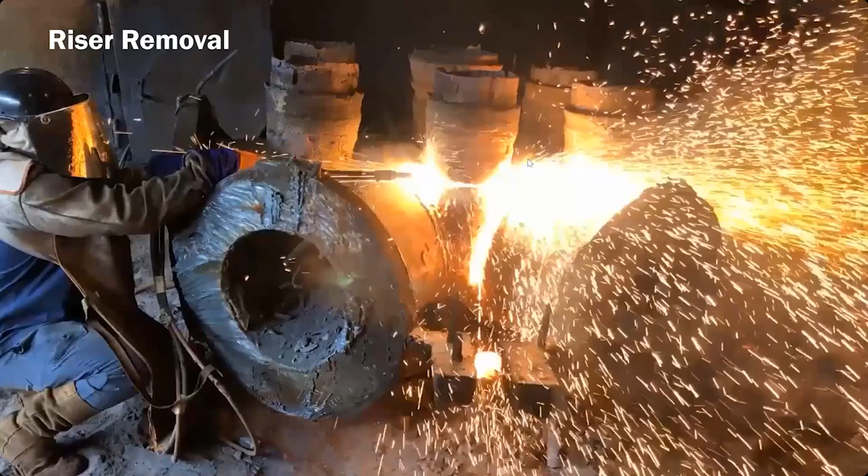With rolled steel continuous casting process, you have problems in plates, for example, with centerline shrink. Steel cools from the outside in, and you can get centerline shrinkage, which is why we don't load plates perpendicular to the direction of rolling. Whereas with castings, we actually have isotropic material through this directional solidification. So these elements are removed, they're cut off.

This was a quench and temper grade, and I wanted to show this. You can see there's a keel block poured alongside this part, which will be destroyed with various types of testing so we can confirm the mechanicals on that part.

Then NDT, a suite of non-destructive testing. Some of these are actually described in 1090 Part 2. A qualified casting manufacturer might even want to exceed the expectations of 1090.2 or an ASTM equivalent. So it's important that in that production specification, the casting supplier has provided not only the suite of tests, but the frequency and acceptance criteria using the standards relevant to the authority having jurisdiction.

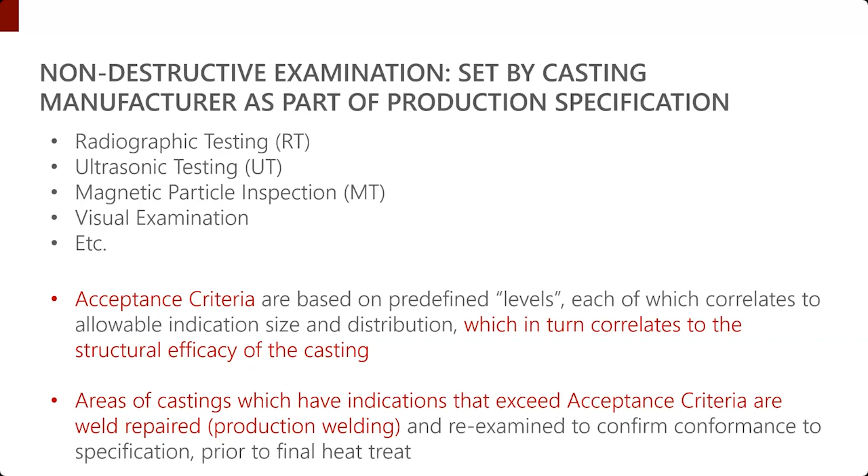Something interesting about steel castings is that always in production, when it is cast, the non-destructive examination will be performed, and they will always find pieces that don't meet the acceptance criteria. That is expected, it's part of the whole process. So they have something variously called weld repair or production welding, because it's part of the production.

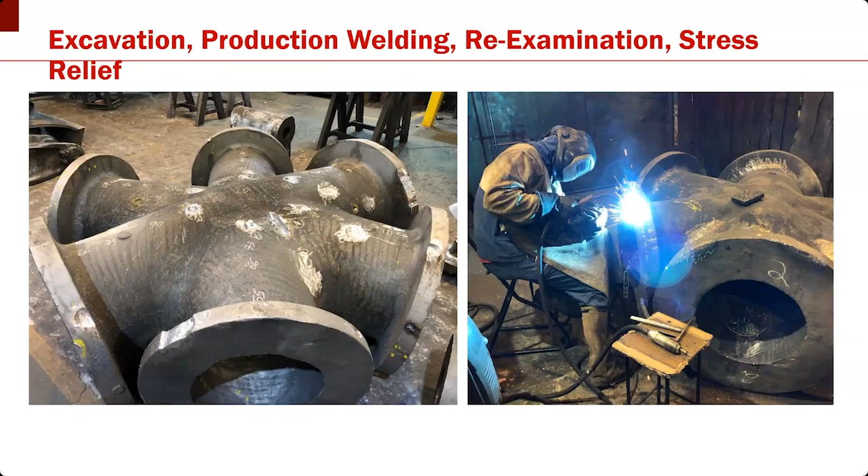That rotten piece is arc gouge weld repaired, so it's removed and filled with weld. The testing is reperformed, and we go through this process until everything meets the acceptance criteria. Then finally, because it's been welded, there's a heat treatment for residual stresses.

I'll skip through some of these, but photogrammetric survey is utilized to confirm geometries, as well as balancing the part so that when it goes into the machining jig, we know the nozzle ends, the faces, and in this case the bolt holes will be exactly in the location they need to be, so that when they get into the shop and into the field, everything goes together and we keep tolerances as tight as possible to enable construction.

Finally, after machining, there's a robot arm that surveys every node and overlays it with the model, and all these reports are provided to ensure that.

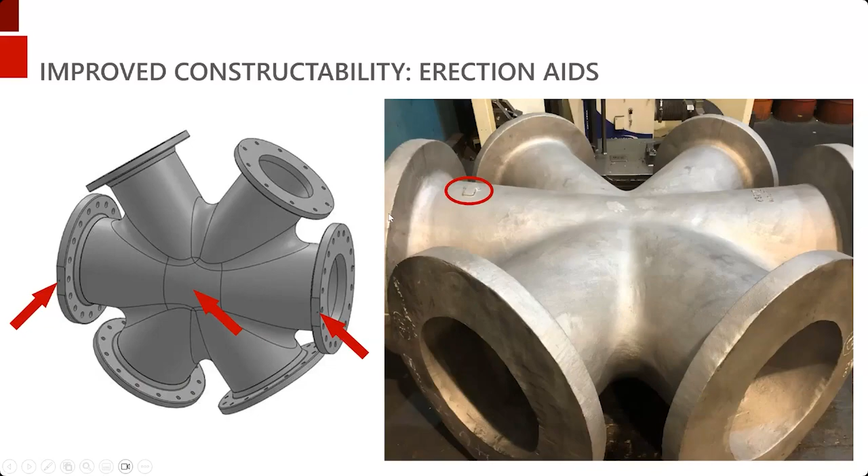There's also clocking marks and metrology survey marks so that when they're in the field, they know that they have the tubes in the right place, clocked, and that they're able to shoot these things and survey them, especially in an area where temperature change is significant.

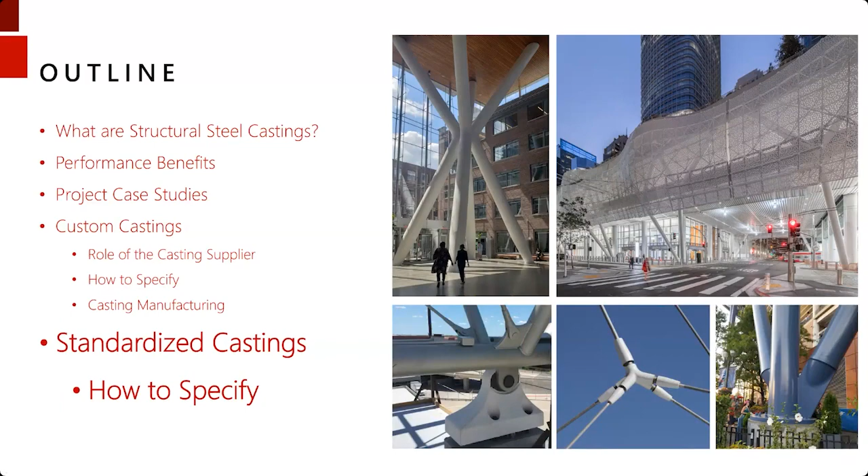All right, the last thing - I don't have too much time, so I'm going to go through this quickly because I want to allow time for questions. In this section, I was going to speak a little more about standardized pre-engineered castings that are available off the shelf.

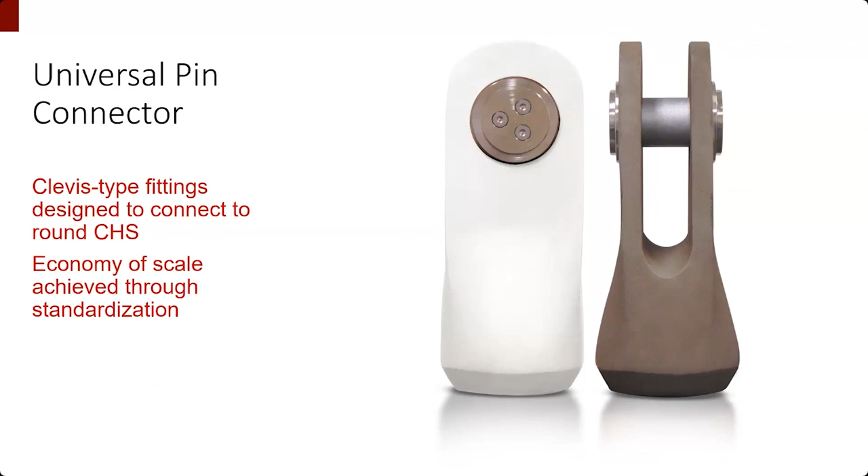I'll show you very quickly some examples - we saw some of this used in a project. It's a Clevis connector for hollow structural sections. This is one of those examples where if you need 2 of these, it's just as good as if you need 40, because we have them available off the shelf. So there's that economy of scale you can take advantage of, from small to large sizes.

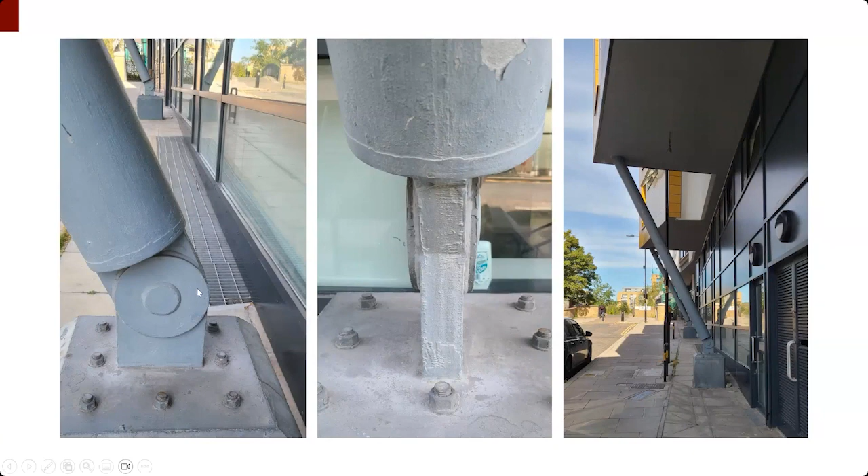This is a fabricated pin down the street from me that I've been scratching my head around. There can be complex fabrication to achieve a pin connection. It's much simpler if you can buy the thing off the shelf, precluding all this profile cutting, which becomes very costly and hard to control from a tolerance perspective. With a standardized casting like this, you just have one downhand weld that goes around the collar of the casting - a real risk reduction for the steelwork contractor if they're able to just purchase this product and plug and play.

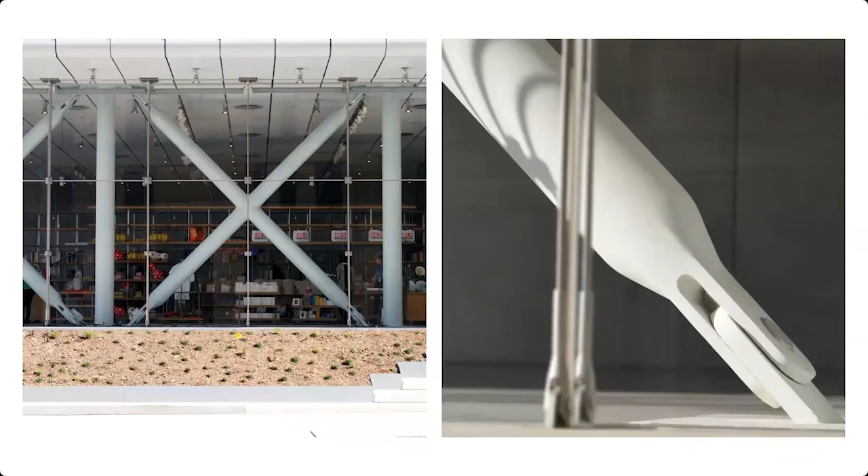Some examples of applications: the Whitney Museum - high profile, high budget - but also a public school library in Ontario utilizes that exact same pin connector that Renzo Piano Building Workshop utilized. One more - the Diablo bolted splice connection.

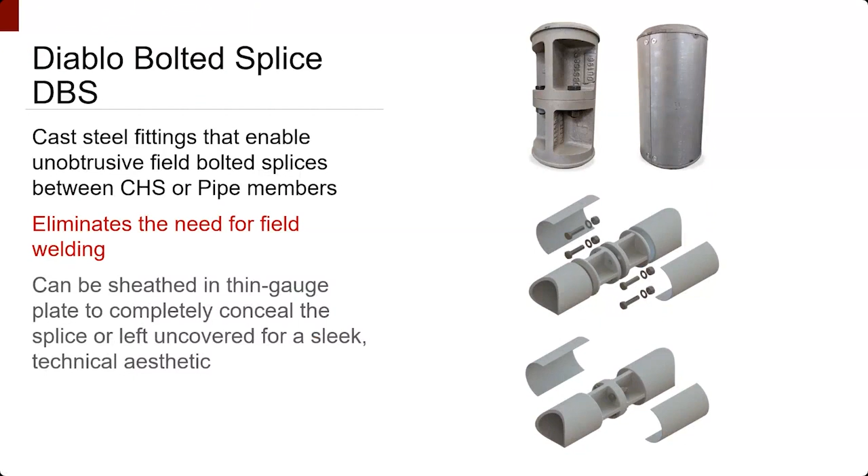With all these standardized cast steel connections, what we're trying to do is eliminate field welding, and if possible shop welding as well. So this is a field bolted splice connection that allows you to have this concealed connection for circular hollow sections. Specifying standardized castings is a much easier process than the custom casting process.

Most manufacturers will have technical data sheets and relevant geometries. They'll have 2D and 3D details for you, Revit, SDS2, and Tekla files. So it's really just dropping in these assets into your design drawings, as well as spec language.

And with that, I will curtail and just come back to this outline that we have for the structural steel castings guide, and I'll turn it over to Nancy to see if we have any questions that came in.

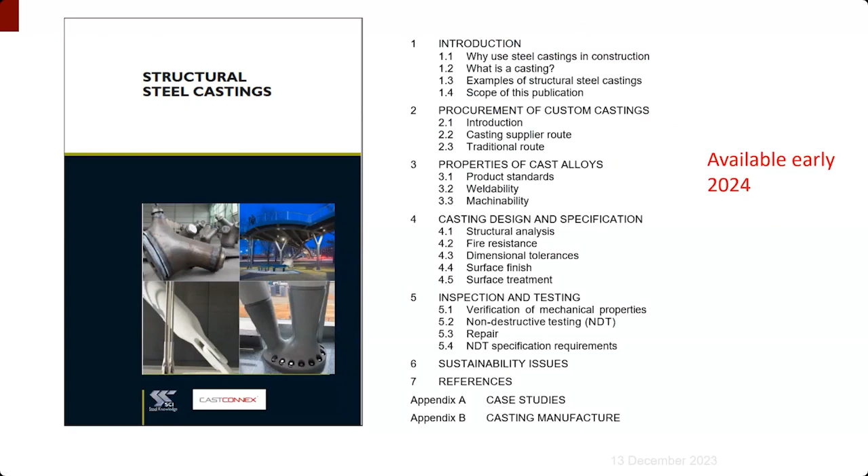Thank you very much, Jennifer, that was a really interesting presentation - you covered a huge amount in just 50 minutes. Yes, there are a few questions, if you don't mind. The first one is about connection stiffness, and obviously a very important point - how would you go about estimating the connection stiffness for a cast steel connection?

There's a few ways of answering that, I guess. It's not really an estimate - once we build a three-dimensional model of the casting, we know its stiffness, we know the material stiffness, and we know the geometry of the part. If the question is in design, perhaps if you're putting together your global model and wondering what kind of stiffness you should have at your connection points, that would be an opportunity to have a conversation with a casting supplier who could build out a design model for you and give you that stiffness. The other way to answer it is it's between rigid and a centerline-to-centerline model - it's not completely rigid, most likely, unless it's a solid casting, which in some applications you might have. But it's going to be stiffer than if the members were modeled to just continue into the joint.

Let's move on now to questions about ductility and toughness. Are there any particular requirements for ductility of castings? We're very familiar with the Eurocode ecosystem when it comes to fracture toughness, say in Eurocode 3 part 1.10. But tell us what you can about ductility and toughness.